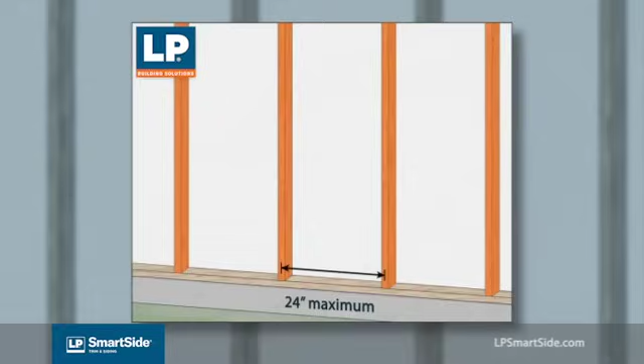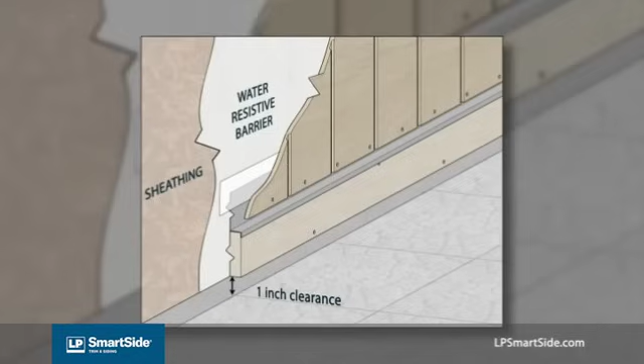LP SmartSide Trim and Fascia can be applied over studs spaced a maximum of 24 inches on center. When installing your trim, keep in mind your trim must extend beyond the thickness of the lap siding. For base trim applications, be sure to allow proper clearances between other structures and the trim: a 6-inch clearance above grade and a 1-inch clearance above all roof lines, sidewalks, patios, decks, and other finished surfaces. Remember, do not install your trim and fascia in contact with masonry, concrete, or brick.

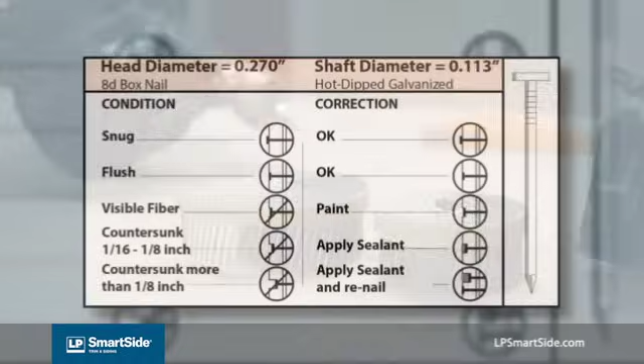When you cut your LP SmartSide products to size, always apply primer and paint to the field cuts with a high-quality, 100% acrylic latex paint. Using a nail gun makes quick work of installing LP SmartSide products. You will want to use a minimum of 0.113-inch shank diameter hot dip galvanized box-style nail with a minimum of 0.270-inch head diameter. The nail should be long enough to penetrate the structural framing by at least 1 inch.

Always set your nail gun so the head of the nail is snug against the siding or flush with the siding surface. Try to avoid overdriving the nails. If you do, seal the hole in exposed substrate with an ASTM C920 Class 25 sealant. If you overdrive the nail by more than 1/8 of an inch, seal the hole and re-nail it.

When applying the trim, you must space all butt joints and ends a minimum of 3/16 of an inch. Then fasten with 4 nails into the stud, 2 nails on either side of the butt joint. Now, let's install trim on the vertical corners.

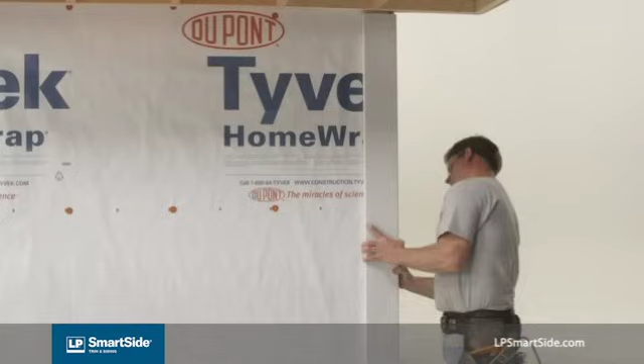You will want to position the trim so that the long vertical seam is not showing on the front of the home. To do this, extend the piece of trim on the front side of the home beyond the end of the wall so that the adjacent piece of trim can butt its edge behind the front piece. This will give your trim a seamless look from a curb appeal view.

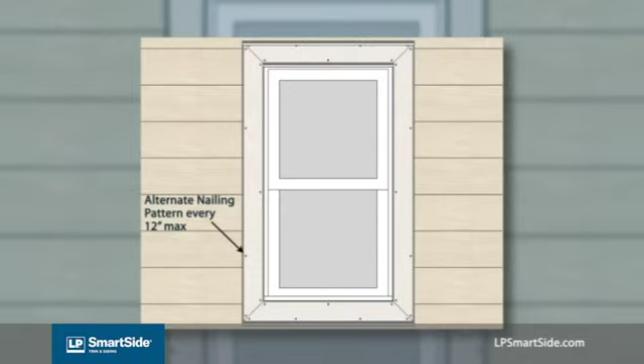All LP SmartSide trim should be fastened with the nails spaced a maximum of 24 inches apart with at least 2 nails in each stud. Or you may fasten every 12 inches with a pattern alternating edges along the trim. Every nail should be placed 3/8 of an inch from the corresponding outside edge.

It is common when applying trim to corners to have to nail into the edge of the adjacent trim board. LP SmartSide trim may be fastened in this way, but remember that you must pre-drill all nail holes first.

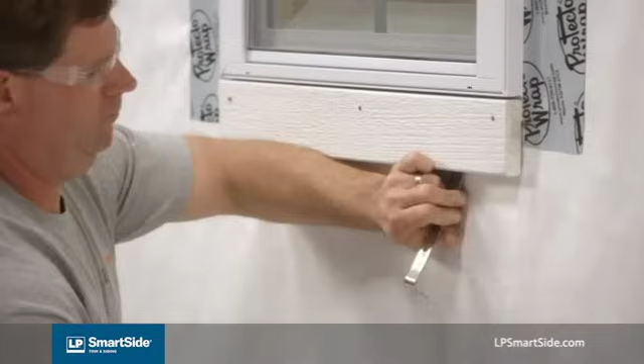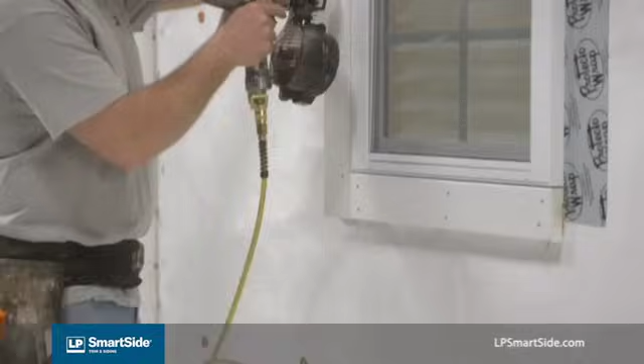When installing trim around windows and doors, there are 2 preferred methods: butted-in joints and diagonal cut joints. Keep in mind, you do not need to space the ends of trim when installing around windows and doors only. Give your trim a little extra room around the perimeter of the window or door by leaving a 3/16 inch space around the window framing. Fasten the trim with the same nailing requirements mentioned earlier.

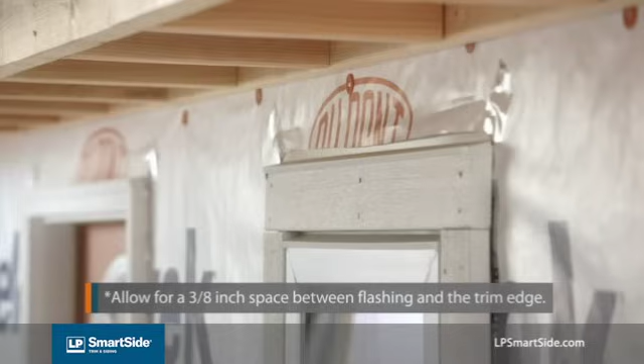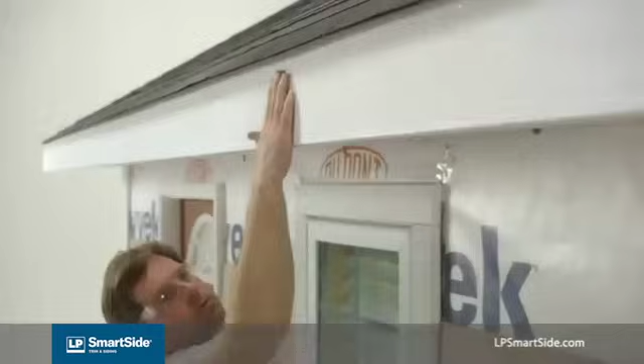Windows will require a Z flashing above the window. Don't forget to allow for a 3/8 of an inch space between the flashing edge and the trim edge. Do not apply sealant in any space where flashing is integrated. Use the same nailing requirements when installing LP SmartSide fascia over a subfascia. Remember to use Z flashing above all horizontal trim and band boards.

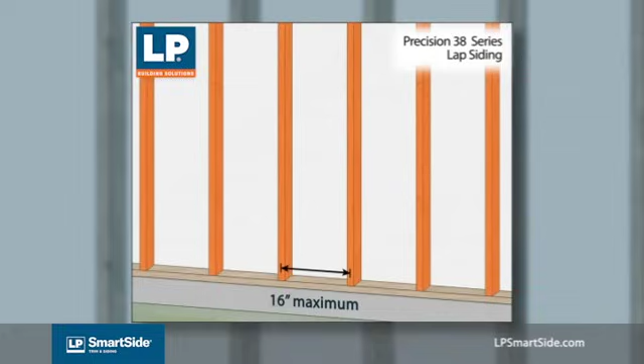Now that your trim has been installed correctly, you're ready to hang your siding. Let's start with LP SmartSide Precision Series lap siding. This siding can be installed over code-approved nailable sheathing or directly to framing. If you install lap siding over framing, use 76 series lap for framing spaced 24 inches on center, or use 38 series lap for framing spaced 16 inches on center.

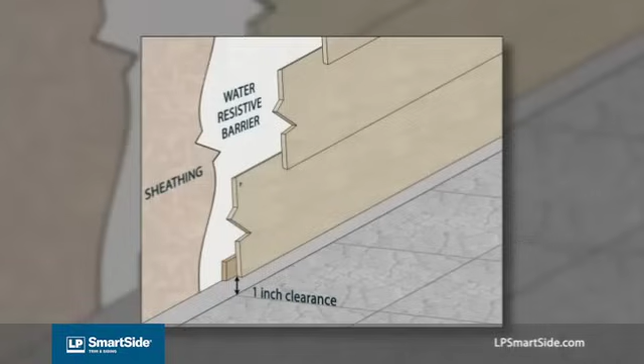Let's begin installing by snapping a level chalk line along the bottom of the wall. Make sure it is level by measuring from the top of the wall down to your clearance height. Remember, the ground clearance is required 6 inches above grade and 1 inch above all roof lines, sidewalks, patios, decks, and other finished surfaces. And do not install the lap siding in contact with masonry, concrete, or brick. Before you can hang your first course of lap, you will want to install a starter shim to give you the proper angle for the first course of lap.

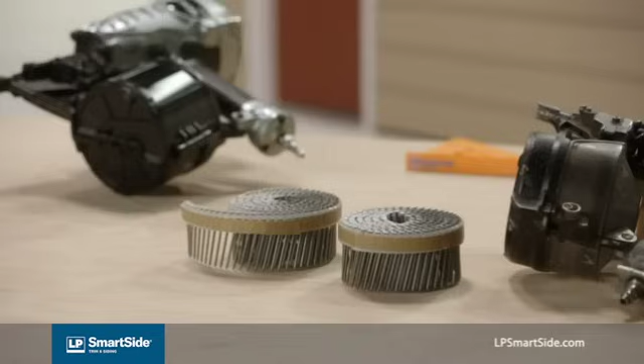Using a nail gun makes quick work of installing LP SmartSide products. You will want to use a minimum of 0.113 inch shank diameter, hot-dipped, galvanized box-style nail with a minimum of 0.270 inch head diameter. The nail should be long enough to penetrate the structural framing by at least 1.5 inches.

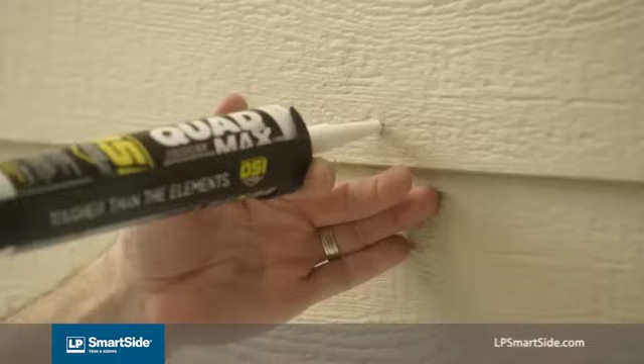Always set your nail gun so the head of the nail is snug against the siding or flush with the siding surface. Try to avoid overdriving the nails. If you do, seal the hole in exposed substrate with an ASTM C920 Class 25 sealant. If you overdrive the nail hole by more than 1/8 of an inch, seal the hole and re-nail it.

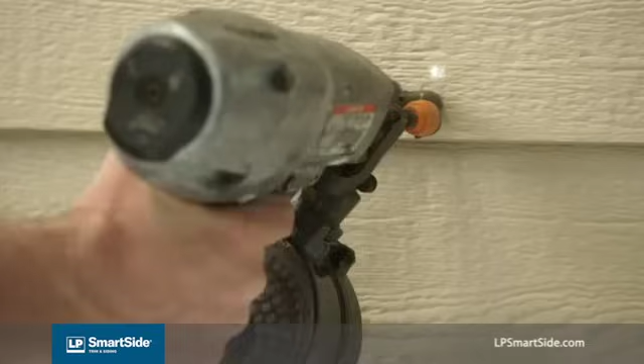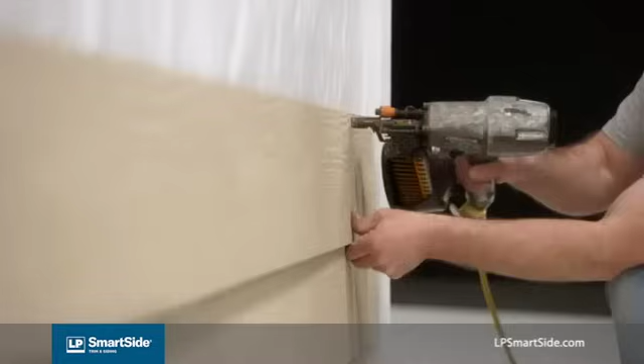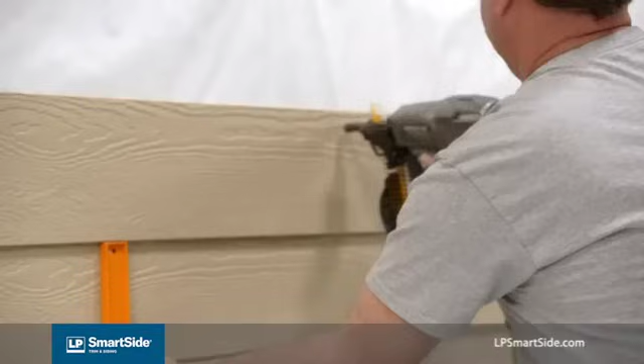Now that the level starter shim is fastened in place, we can begin our first course of lap siding. Make sure the piece is level and that the ends land on studs. Then start nailing from one end to the other on every stud. When blind nailing LP SmartSide lap products, place the nails roughly 3/8 of an inch from the siding's ends and roughly 3/4 of an inch from the top edge.

For the following pieces of lap, be sure to allow for 3/16 of an inch space at each end of the lap and each butt joint. Overlap successive courses by a minimum of 1 inch. And remember to stagger your joints over stud locations for a more natural appearance.

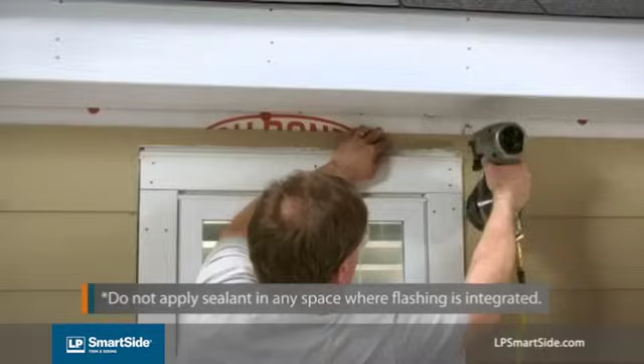There are a few things to remember when installing LP SmartSide lap siding around windows. Windows will require a Z flashing above the window. Don't forget to allow for a 3/8 inch space between the flashing edge and the siding edge. Do not apply sealant in any space where flashing is integrated. Also, below windows may require a piece of lap siding to be cut to shape. When this occurs, you will have to face nail that piece every 8 inches on center.

Once your trim and siding is hung, it's time to seal all expansion joints and corner joints with an ASTM C920 Class 25 sealant.

It can be common practice for some builders to finish the front of the home with lap siding and the remaining walls with panel siding. LP SmartSide 4-foot wide panel siding comes in lengths of 8 to 10 feet long and equipped with shiplap edges. This can save money and time during installation.

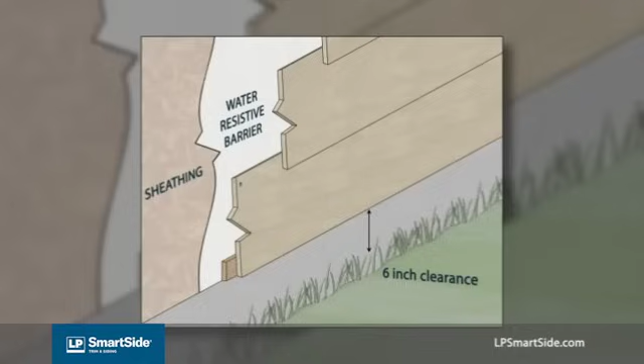Once flashing and trim have been properly installed, you can begin hanging your panel siding. But let's not forget some of LP's basic requirements. Remember, the ground clearance is required: 6 inches above grade and 1 inch above all roof lines, sidewalks, patios, decks, and other finished surfaces. And do not install the panel siding in contact with masonry, concrete, or brick.

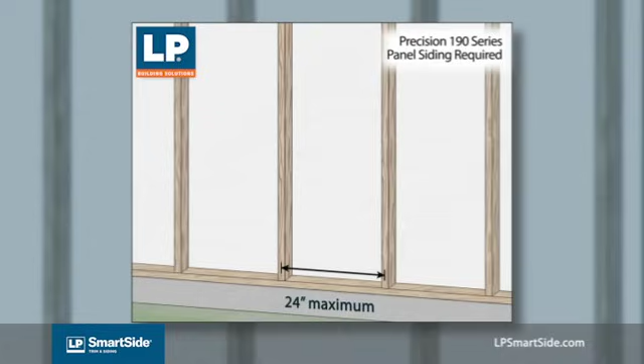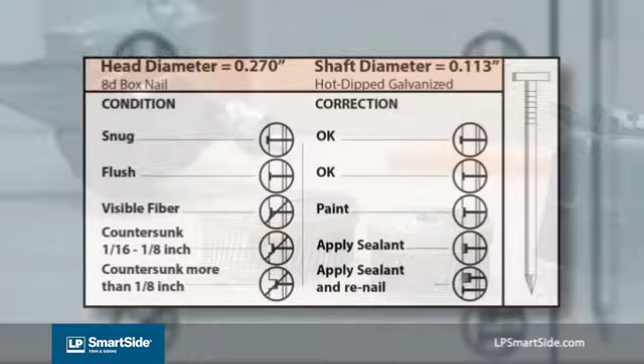All LP SmartSide panel siding may be installed over 16-inch on-center framing. When installing over 24-inch on-center framing, you must use Precision 190 series panel siding. Using a nail gun makes quick work of installing LP SmartSide products. You will want to use a minimum of 0.113-inch shank diameter, hot-dip galvanized box-style nail with a minimum of 0.270-inch head diameter. The nail should be long enough to penetrate the structural framing by at least 1.5 inches.

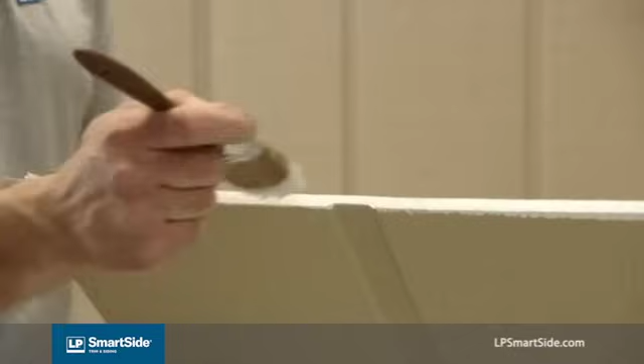Always set your nail gun so the head of the nail is snug against the siding or flush with the siding surface. Try to avoid overdriving the nails. If you do, seal the hole in exposed substrate with an ASTM C920 Class 25 sealant. If a nail is overdriven by more than 1/8 of an inch, seal the hole and re-nail it. When you cut your LP SmartSide products to size, always apply primer and paint to the field cuts with a high-quality 100% acrylic latex paint.

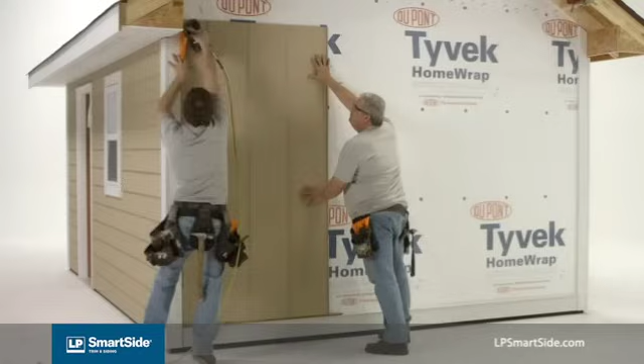The base trim piece must be flashed with Z flashing. Allow for 3/8-inch gap above the flashing before installing your panel siding. You'll want to treat every horizontal joint with flashing and spacing when hanging LP SmartSide panel siding. Position your panel siding so it's level and the shiplap edges fall on the center of studs. You will then use a double nailing technique along the shiplap edge. Nail through the shiplap on the first panel, then nail 1 inch from the edge at the overlap flange on the second overlapping panel.

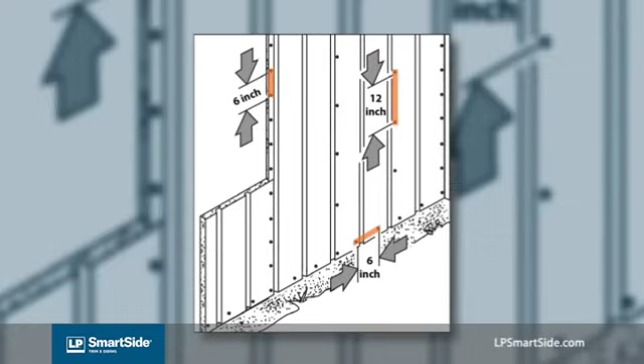When nailing the rest of your LP SmartSide panel siding, make sure you space your nails no more than 6 inches apart at the panel's edges around the perimeter and no more than 12 inches apart at the intermediate stud supports. Whenever your panels butt against windows, doors, or trim, leave a minimum 3/16-inch space. Remember, when installing LP SmartSide panel siding around windows, that Z flashing will be required above the window. Don't forget to allow 3/8-inch space between the flashing edge and the siding edge. Do not apply sealant in any space where flashing is integrated.

Installing LP SmartSide Cedar Shakes combines the practices of lap siding and panel siding. They use an overlap layout and have a shiplap edge design. You will begin again by snapping a level chalk line and installing a starter shim. Remember to abide by required clearances and flashing practices before hanging your first piece of cedar shake. Do not install the shakes in contact with masonry, concrete, or brick. Install cedar shakes on stud spacing no greater than 16 inches on center. You will want to use a starter shim that is roughly 1.5 inches wide and 3/8 inch thick.

Remember, when you cut LP SmartSide products to size, always apply primer and paint to the field cuts with a high-quality 100% acrylic latex paint. You will want to use a minimum of 0.113-inch shank diameter, hot-dip galvanized box-style nail with a minimum of 0.270-inch head diameter. The nail should be long enough to penetrate the structural framing by at least 1.5 inches.

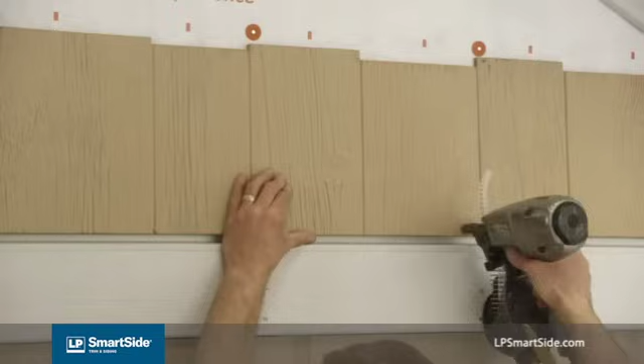Always set your nail gun so the head of the nail is snug against the siding or flush with the siding surface. Try to avoid overdriving the nails. If you do, seal the hole in exposed substrate with an ASTM C920 Class 25 sealant. If a nail is overdriven by more than 1/8 of an inch, seal the hole and re-nail it. You must face nail LP SmartSide Cedar Shakes.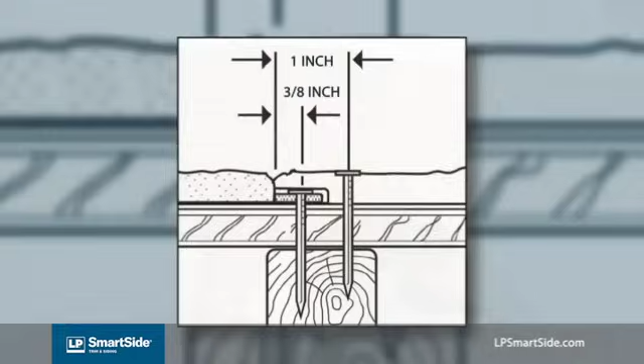Install the first course upside down for a straight drip edge along the bottom. You will then use the double nailing technique along the shiplap edge. Nail through the shiplap on the first panel, then nail 1 inch from the edge at the overlap flange on the second overlapping panel. Overlap successive courses a minimum of 1 3/4 inch. LP makes it simple. You can use their alignment notch in the shiplap edge as an automatic guide to lap each course. Face nail all shake pieces roughly 3/4 of an inch from the bottom edge to penetrate both courses.

To continue with a straight drip edge appearance, you will want to follow this sequence. Starting from right to left, level and install the first course of siding so the straight edge is no more than 1/2 inch below the starter shim.

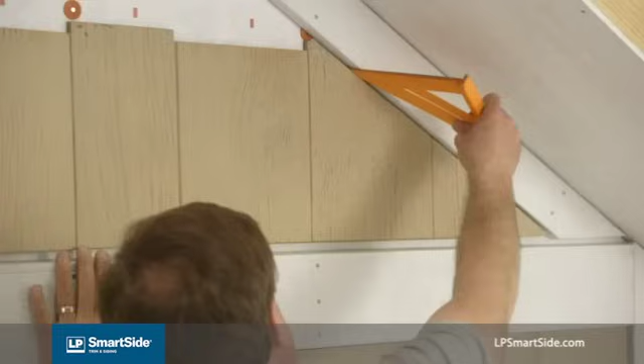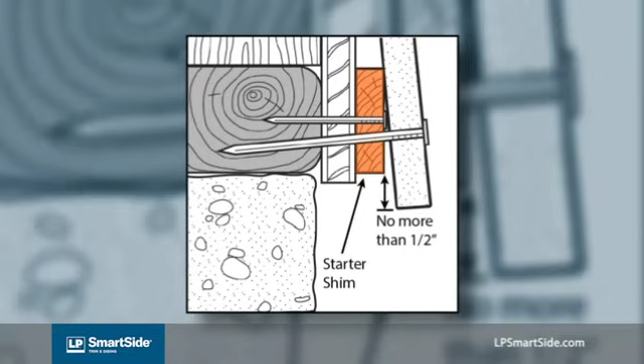Trim the right edge so that the siding section fits against the corner board with a 3/16 inch space, and so that the opposite shiplap edge falls on a stud for nailing. If you would like to achieve the intended random drip edge appearance, you will need to follow this sequence. Starting from left to right, level and install the first course so random edge is no more than 1/2 inch below the starter shim. Trim left edge so that siding section fits against corner board with a 3/16 inch space and so that the opposite shiplap edge falls on a stud for nailing.

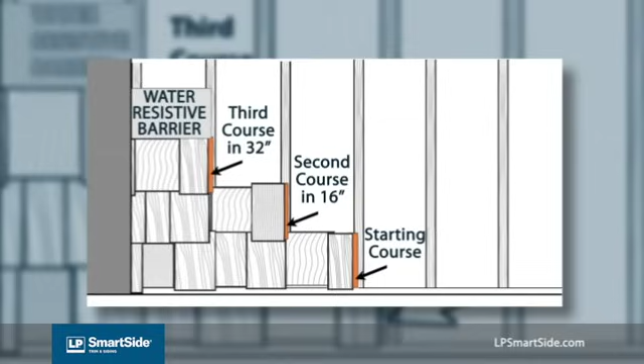You can also achieve a staggered joint appearance with LP SmartSide Cedar Shakes. You can do this by trimming the second course starter piece of shake 16 inches shorter than the first course, and then trim the third course starter piece of shake 32 inches shorter than the first course. Repeat this same sequence every 3 courses.

You may find yourself installing LP SmartSide shake siding around windows. Windows will require a Z flashing above the window. Don't forget to allow for 3/8 of an inch space between the flashing edge and the siding edge. Do not apply sealant in any space where flashing is integrated.

Now that you've properly installed your LP SmartSide trim and siding, it's time to install your LP SmartSide soffit. LP makes their soffit with several designs, including panel soffit and cut-to-width soffit, which is available both as vented and non-vented. LP SmartSide soffit can be applied over framing that spans a maximum of 24 inches on center. One thing to remember when installing LP SmartSide soffit is all ends and edges must be supported or backed by solid 2x4 inch or larger framing.

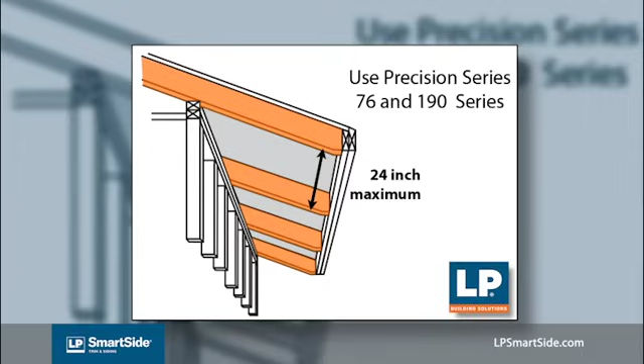If you are using LP SmartSide vented soffit, try to avoid cutting through the vented areas. Also, if you are installing an open soffit application, you must use LP SmartSide Precision 76 series or 190 series soffit. As with all LP SmartSide products, do not install the soffit in contact with masonry, concrete, or brick.

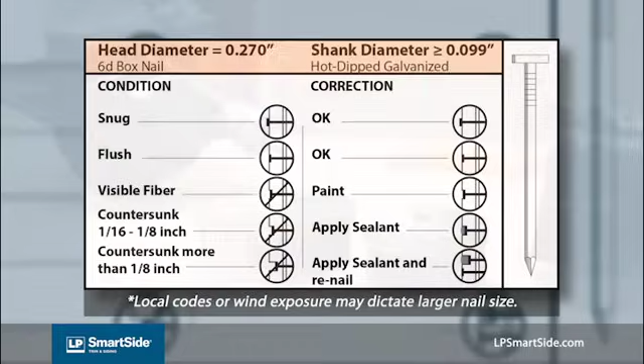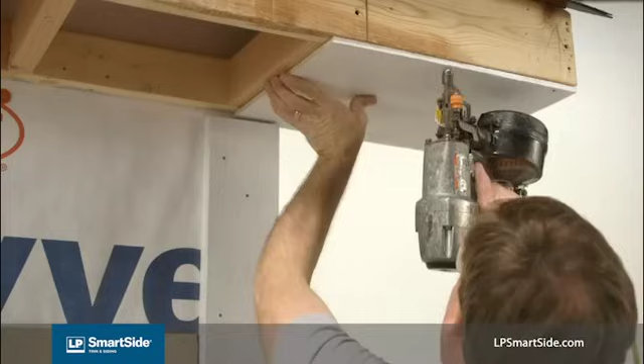You will want to use a minimum .099 inch shank diameter hot dip galvanized box style nail with a minimum .270 inch head diameter. The nail should be long enough to penetrate the structural framing by at least 1.5 inches. Always set your nail gun so the head of the nail is snug against the siding or flush with the siding surface. Try to avoid overdriving the nails. If you do, seal the hole in exposed substrate with an ASTM C920 Class 25 sealant. If you overdrive the nail by more than 1/8 of an inch, seal the hole and re-nail it.

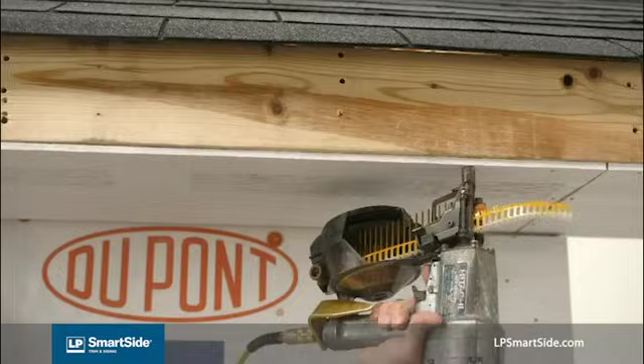When you cut LP SmartSide products to size, always apply primer and paint to the field cuts with a high-quality 100% acrylic latex paint. Position the soffit so all ends and edges land on studs. Then begin nailing. You should nail around the perimeter a maximum of every 6 inches and every 12 inches at intermediate supports. When nailing the perimeter, space your nails 3/8 of an inch from the edges. When nailing up your soffit, make sure you space all ends and butt joints a minimum of 3/16 of an inch.

By following the installation guidelines outlined in this video, along with LP SmartSide installation instructions, you can give your homes a signature look that will delight homeowners and that homebuyers can't resist.

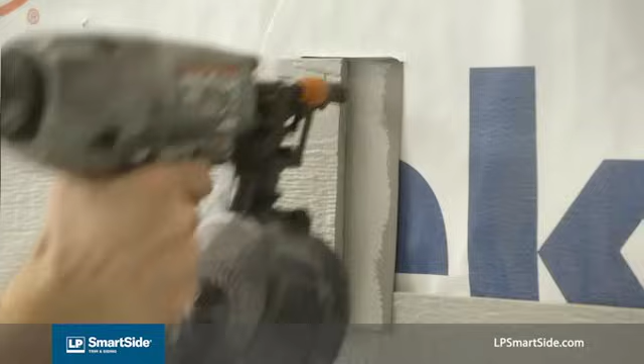The second preferred practice is achieved by using pan flashing behind the butt joints. In many cases, you will be able to color match the pan flashing to match the pre-finished SmartSide products. Begin by nailing the length of the lap siding, but do not nail the ends. The ends that make up the butt joint should both be factory painted ends and spaced a minimum of 3/16 of an inch. Before nailing the ends of the lap, slide the pan flashing into place so the butt joint lands at the middle of the flashing and the flashing overlaps the course below. Then nail the ends of the lap into the stud. You will want to do this in every butt joint.

The third preferred method of butt joint treatment for pre-finished lap siding is by using a joint molding or H-clip. Fasten the length of the lap, but do not fasten the ends of the boards. Install the lap with a 1/4 inch space at the butt joint. Then carefully slide your joint molding into place until the bottom is flush with the bottom of the siding. Once the joint molding is in place, fasten the ends of both lap boards to the stud.

Welcome to LP SmartSide installation tips. What you're about to learn can be used as guidance when repairing butt joints that were not spaced correctly and may be causing your lap siding to buckle. You want to remember to space all ends and butt joints a minimum of 3/16 of an inch. Let's begin with the remedy process.

You will start by using wooden wedges to separate the affected piece of lap from the overlapping piece above. To protect the house wrap from this next step, you may use a piece of metal sheeting to slide behind the lap siding. Using a keyhole or reciprocating saw with a fine-tooth blade, remove enough material from the end of one piece of lap siding in order to provide at least 3/16 inch space. If any area of the siding has been forced to deflect away from the wall, face nail only that area to flatten the piece back against the wall. Be sure to properly caulk and paint all exposed nail heads.

Remove all loose debris, sawdust, and leftover caulk from the expansion joint to smooth out the cut ends so that the surface is prepared for finishing. Using a brush, prime all exposed wood fibers in accordance with installation instructions. Be sure to follow the coating manufacturer's application and maintenance instructions. Seal the gap with an ASTM C920 Class 25 sealant. Be sure to follow the manufacturer's instructions for application and backer rod requirements. Finish the repaired area using an exterior paint consistent with LP SmartSide installation instructions. Be sure to follow the coating manufacturer's application and maintenance instructions.